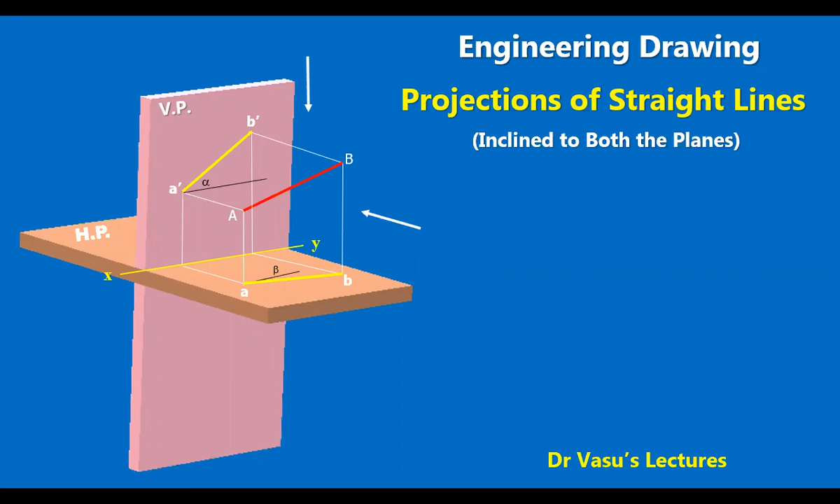Coming to this, a line AB 75 mm long, its true length is given, and making 45 degrees angle with VP, that is angle phi is given, while its front view makes 55 degrees, that is alpha. This angle is alpha. Front view is making 55 degrees. Alpha is given. And A position is given 10 mm above HP, 15 mm in front of VP. So you are asked to find its inclination with the HP, horizontal plane, and its projections.

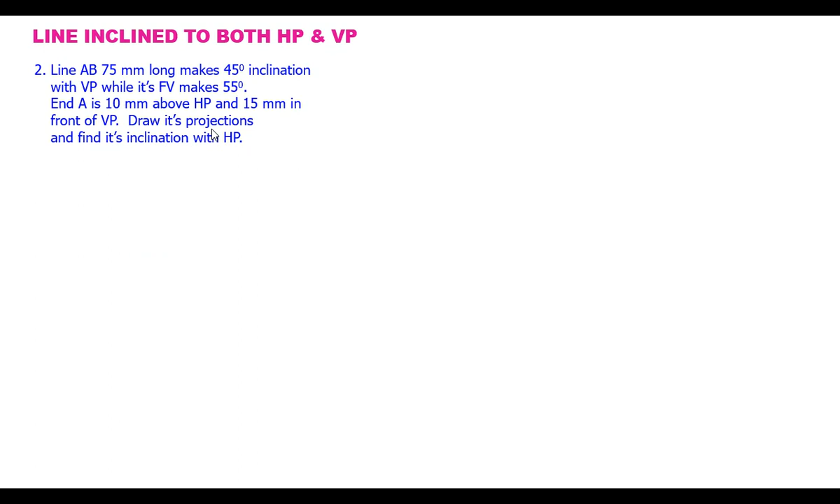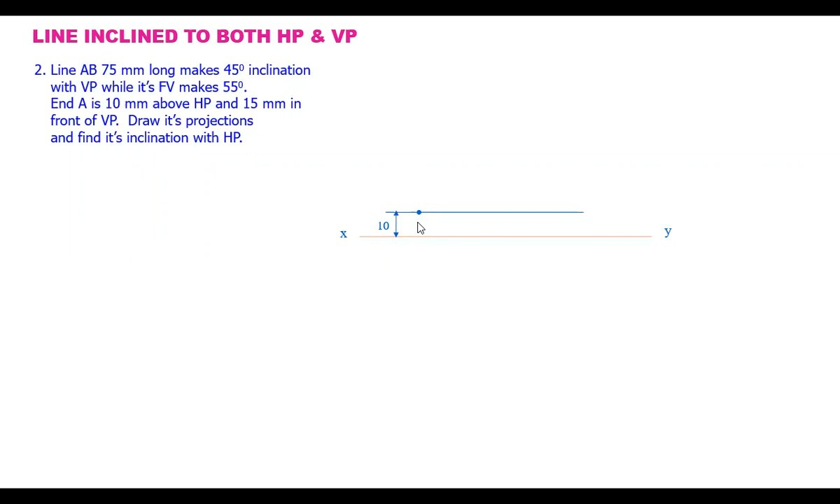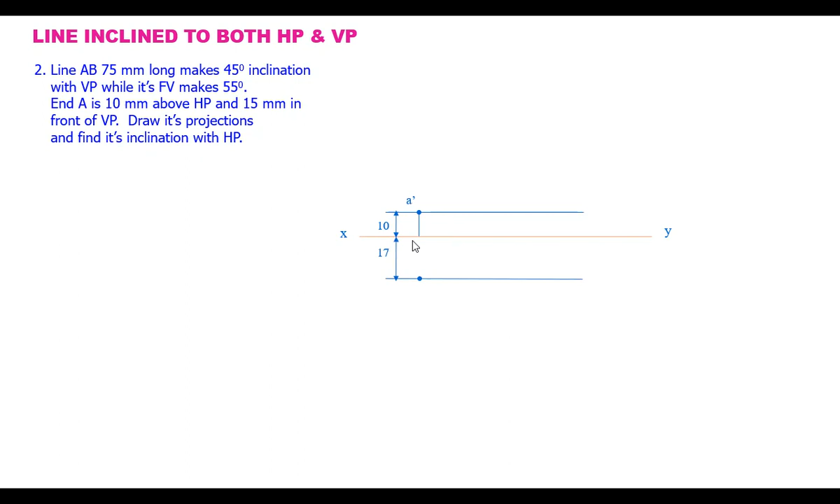Let's draw the projections. So here, let's mark the point A here, 10 mm above HP. So the point is here at a height of 10 mm above the reference line. We call it as A dash, right? And 15 mm in front of VP. So in the same projector, we have this point at 15 mm. This is 15 mm in front of VP. So this is point A. So A and A dash both are on the same projector.

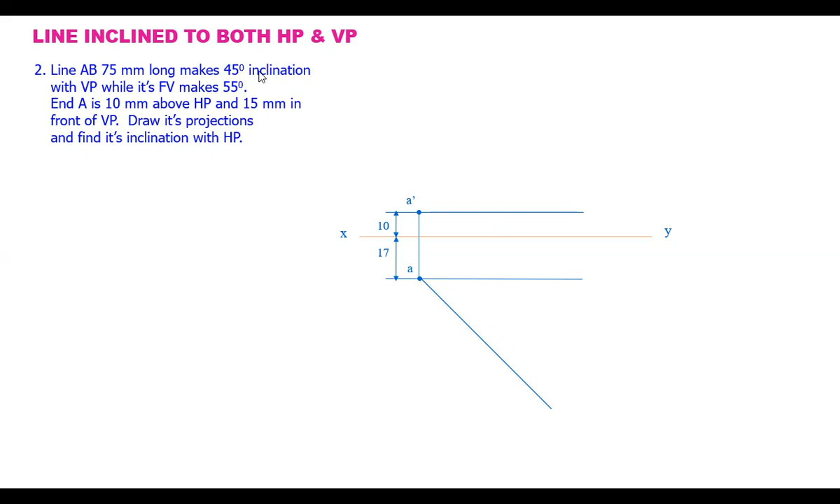Now, suppose we are assuming the line parallel to HP. When the line is parallel to HP, its true length is visible, 75 mm long line, we can see it. Also, the angle with the vertical plane, 45 degrees is visible. So we draw a line here at 45 degrees angle and mark 75 mm, that is the true length of this line. Now, we call it as B2. B2 is the one initial position, and in this position, the line is parallel to HP, making angle only with the VP.

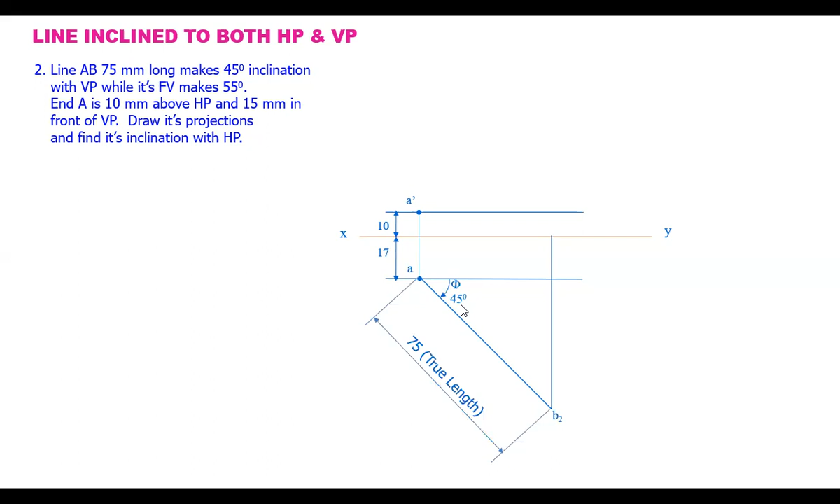Now let's draw the front view of this line and just draw the projector up to the reference line. And here, when you know the point B, draw a locus of point B in the top view. That is parallel to the reference line passing through B. Now, this is the locus of B in the top view. Extend this and let's draw the front view of this line, that is B2 dash. Let's mark B2 dash here, and A dash B2 dash is the front view of this line. A B2 is the top view. So this is one initial position.

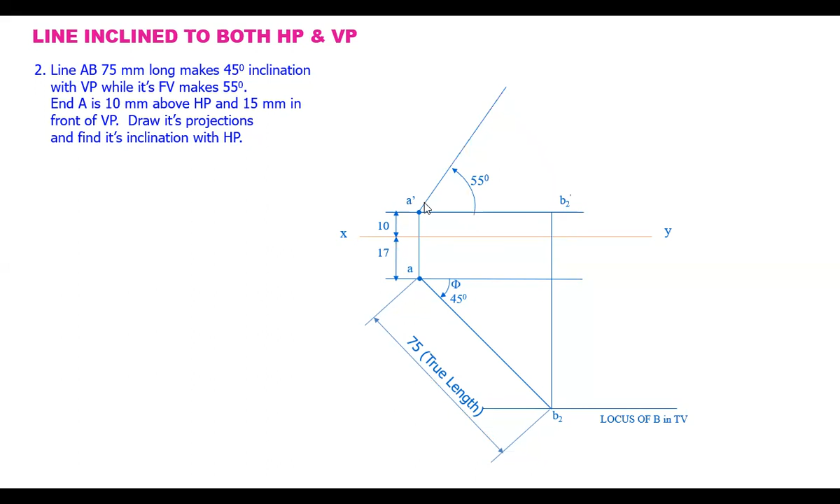Now let's mark another data here. Front view is making 55 degrees angle. So you know A dash. Let's draw a line A dash B dash at an angle of 55 degrees. So here, at 55 degrees, we have drawn a line. And we don't know the front view length, how much this line is. We know that front view is on this line, but we don't know where B dash is actually lying.

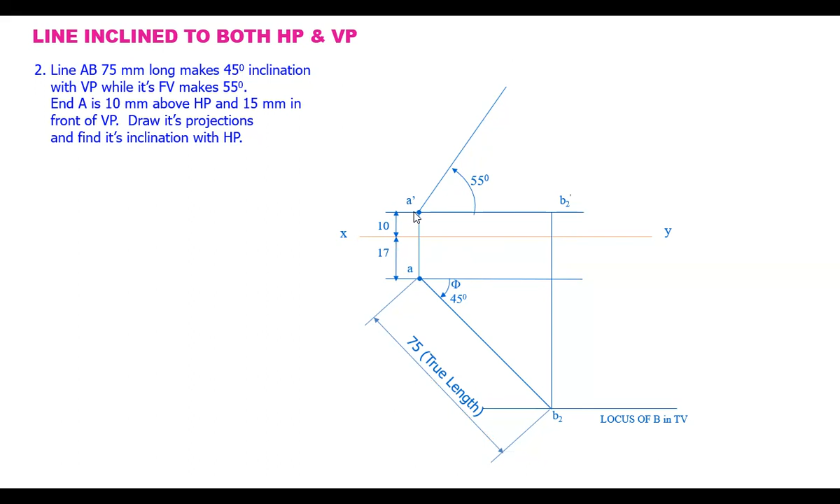Coming to this initial position, we know when the line is making angle with the VP, we know the length of this line in the front view. That is A dash B2 dash. A dash B2 dash as radius, A dash as center, let's draw an arc, right? Because the front view length of this line is this much only. It can't be more or less. When you draw an arc, this intersects the line drawn at 55 degrees angle at some point. Now that point is the B dash, because A dash B dash is the front view of the line.

Now we know the position of B here. Okay. Now we can draw the locus of B in the front view. Draw a line parallel to the reference line. That means the point B must be lying on this line only. So once we draw this line, point B is lying here. So this is the locus of B in the front view.

Next, we know the true length of the line. We know the locus of the line, also true length of the line. I assume the line parallel to VP, that is another initial position. When the line is parallel to VP, its true length is visible in the front view. Because we know the locus of B in the front view, with the true length 75 mm radius from A dash, we draw an arc here intersecting this locus at a point called B1 dash. So this is the true length.

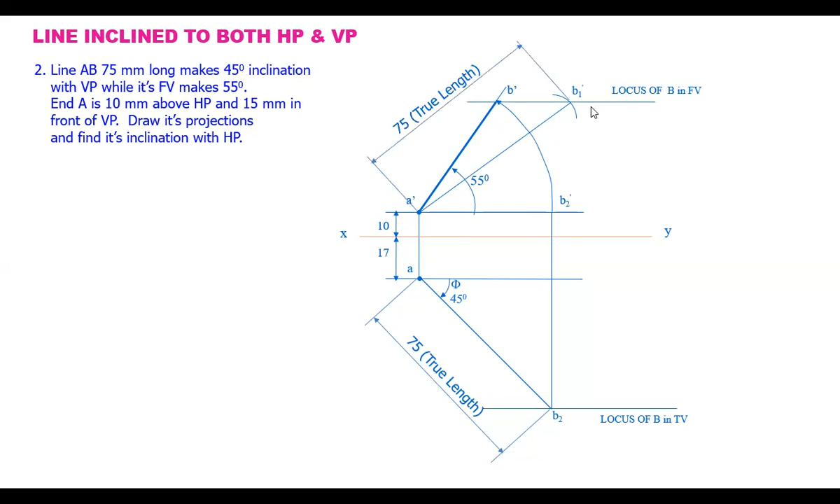And not only the true length, we also see the actual or the true inclination, that is theta with HP. So you can measure this angle theta, and that is the required angle with the HP. Okay. So like this, we go on representing the data, we can find the final projections of the line and also the required angle here.

So you draw the projector from B dash. We haven't drawn the top view yet. So we know the B dash. Once we know the B dash, draw a projector from B dash onto the locus here. When you draw up to the locus, you get the B here in the top view. So mark B and join AB. That is the final top view.

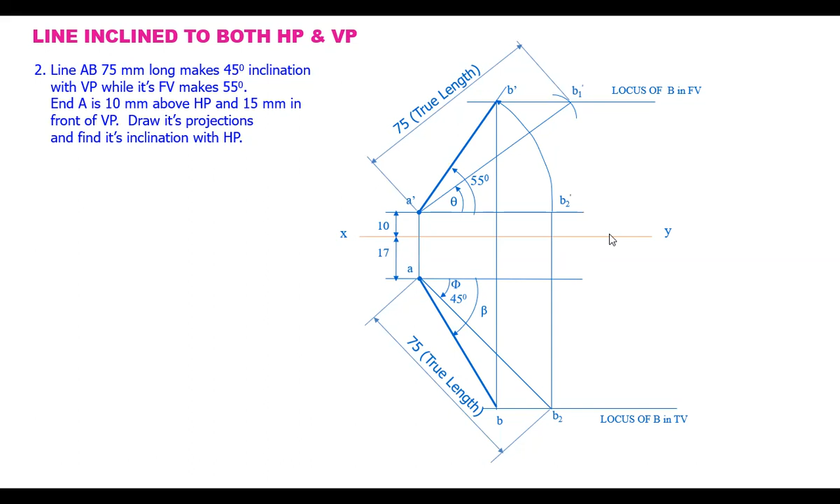Now, the angle of this line, the final top view, making the apparent angle here, that is called beta. So you are given the apparent angle and the true inclination phi, but we are able to find theta and apparent angle beta. Okay, so like this, we'll be drawing the projections of the line and finding the required angles.